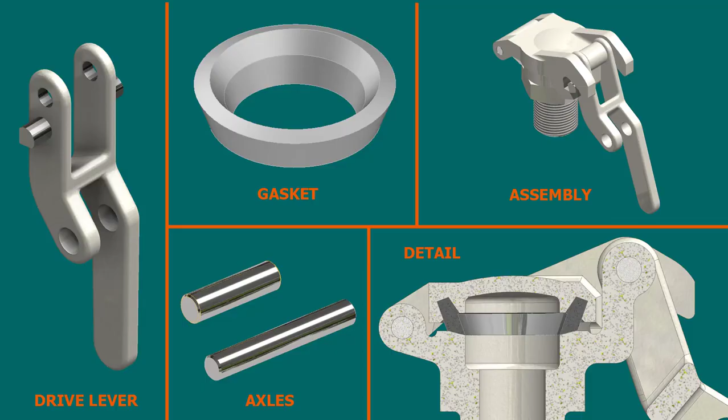Hi my friends, today we'll create the last of 3 parts: drive lever, then a gasket and 2 axles to create an assembly, and then we'll study how this assembly works. The other 2 parts are hinges body and valve lid, and they were presented in my previous 2 tutorials. Today we concentrate on the 3rd object.

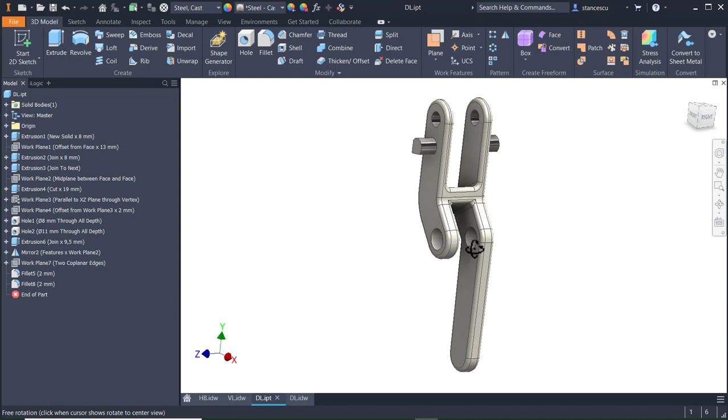This one, which is a handle. Its drawing is this. There are some small difficulties with this contour, but we'll create the part in order by using this drawing.

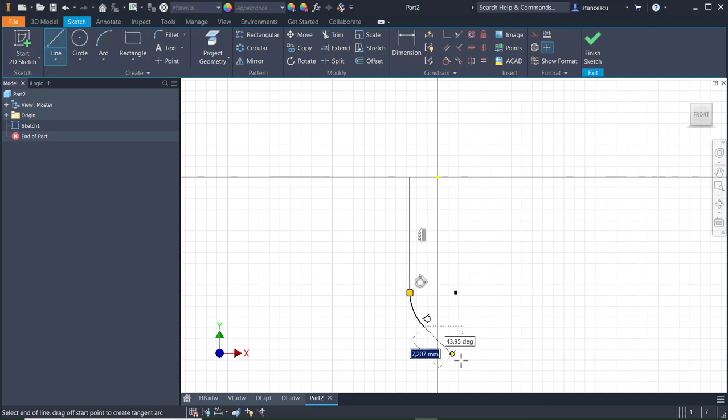Good. Let's start with creating this part. In the plane XY, we draw some lines, arcs, as you can see here, by using methods you already know. If you study all my tutorials, we have no time to repeat everything.

Yes, this is the first contour. This point is coincident with the center point. This arc is equal in radius with the other one.

There is a non-tangent connection between these two. These 2 points are coincident, centers of the 2 arcs.

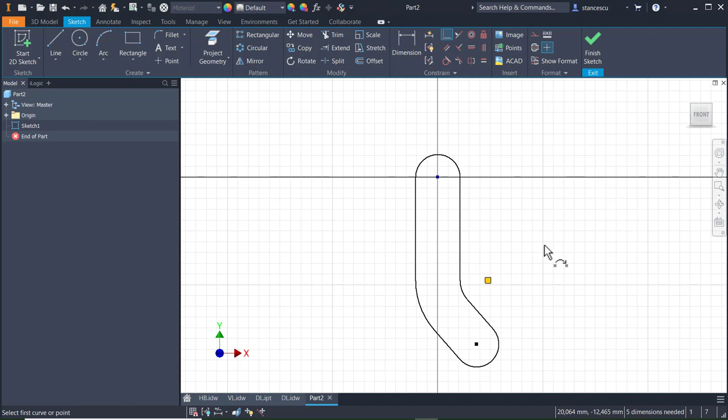Dimensions. This is 10. Everything is scaled now. The angle is 40 degrees. And this dimension is 60, aligned 60, as you can see.

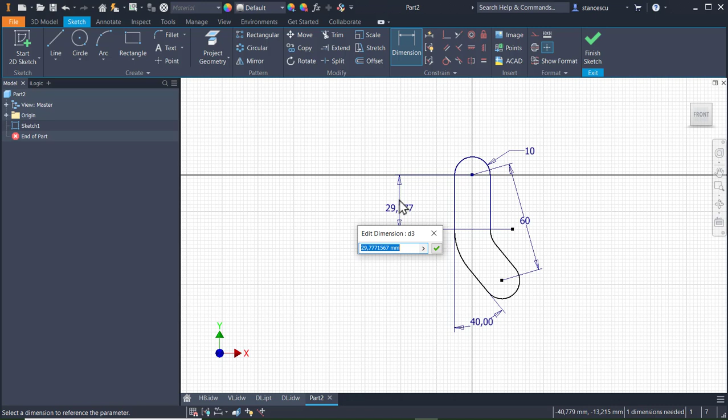Good. Other dimension is the distance between these 2 centers of 38. And one dimension is missing, but I don't know which one. Let's see. Apply. Oh, the radius. I forgot this radius, which is 25.

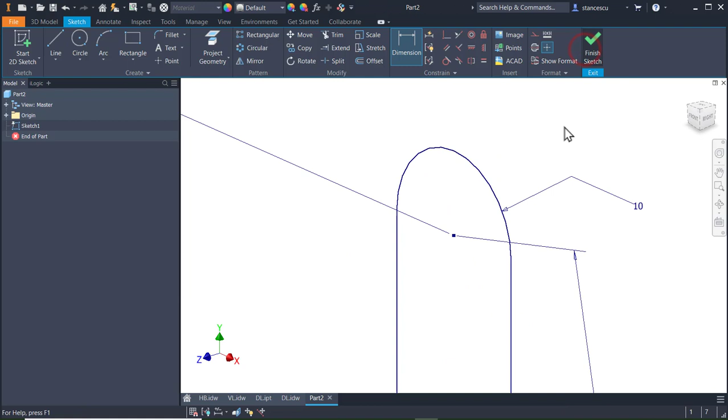Okay, now it's fully constrained. Finish sketch. F6. You see the thickness is 5, but we'll use the thickness of 8 in order to have this thicker arm, and then we'll cut here. So 8 is the thickness for the moment.

Okay, we create another plane at a distance of 13, yes, to be here on this face, and we'll create the other arm by projecting this one and continuing with a protrusion. This.

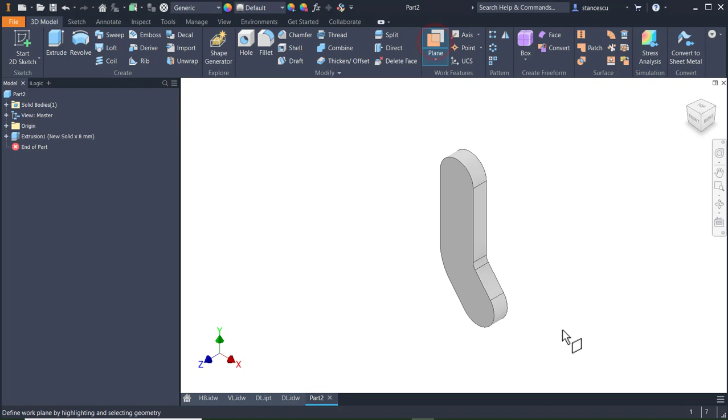Okay. Plane. F6. Sketch. F7, not F7 but project all the contour, F7 to see that contour, and then we create a full circle here.

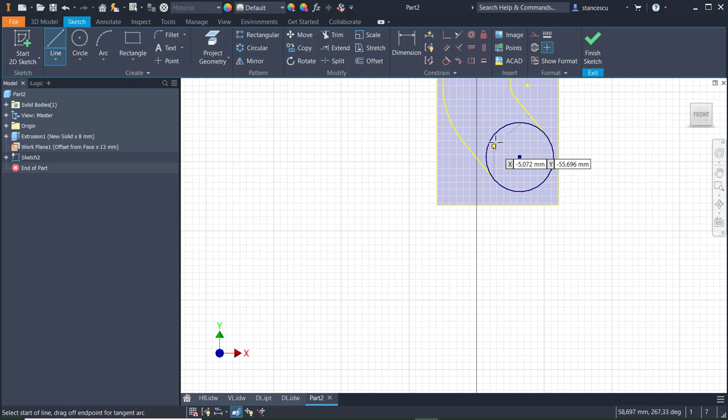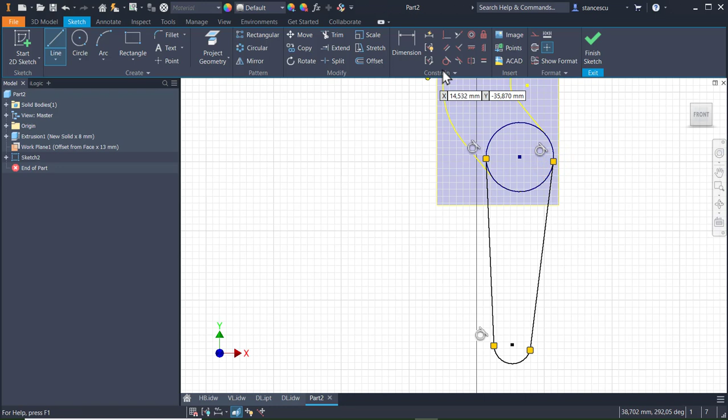And we draw that protrusion. Keep pressed the button and you have a tangent. Keep press the button and you have an arc. And then go back to the circle till you see tangent mark. And then apply tangent also here.

The same vertical for these two centers. A radius of 9 here. And a distance of 60 between the two circles.

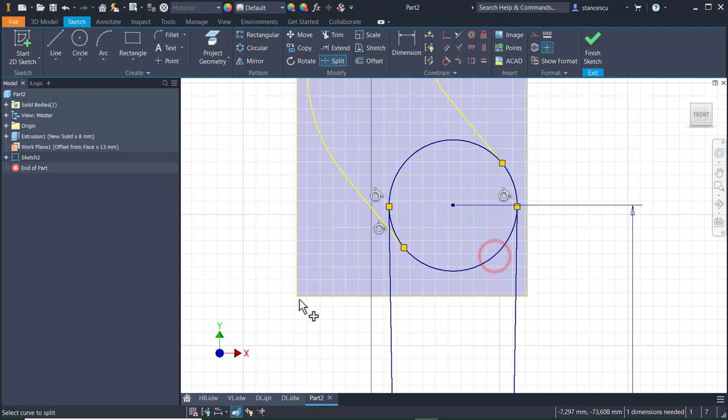60. Now we trim using split this circle in parts to make these two as construction lines, and also this construction. We split also this line to make this construction, and we make construction this line because we draw a new line shorter than this shorter line.

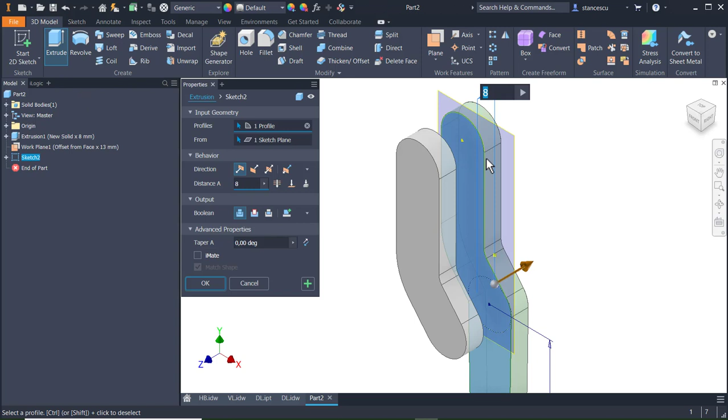Finish sketch, extrude, also 8 in this direction. Okay, visibility. F6. We continue with this connection between the two arms, which is dimensioned here.

As you can see, there is a dimension of 32 for this point and a line at 30 degrees. The other line is parallel 8 millimeters.

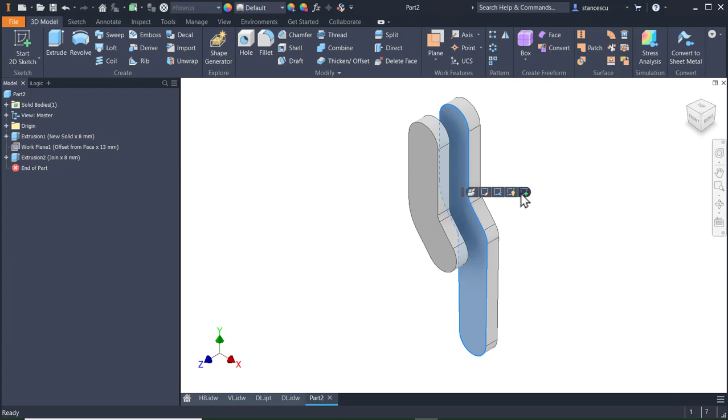Okay, we use this face F7. We draw a line from a point here to this direction, and we dimension it to see where it is placed, that 32. We project the x-axis, this is x, and we make this construction to have no problems.

Dimension 30 degrees here. Another an offset of this line to 8, and then trim, and okay.

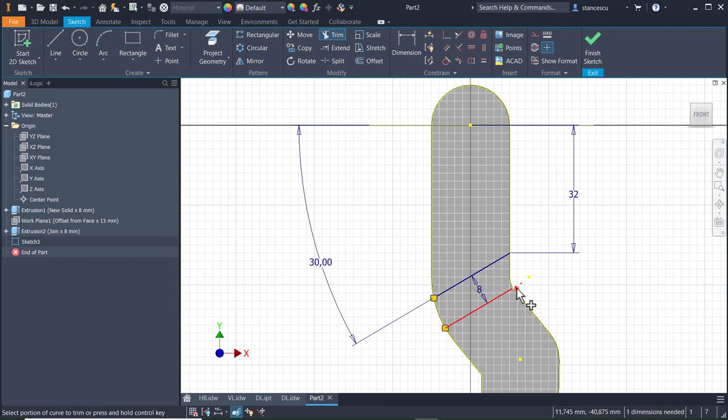Now we extrude this area between the two lines to the part. Okay, F6. This is the main body.

We continue by placing two holes, 8 and 11. This face, this center, 8, plus this face, this center, 7. Not 7, 11.

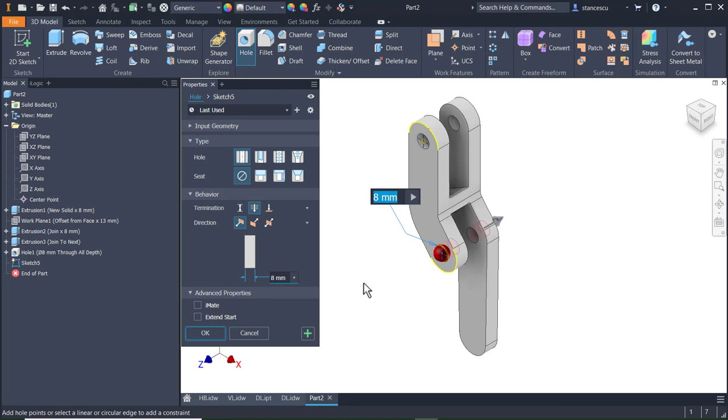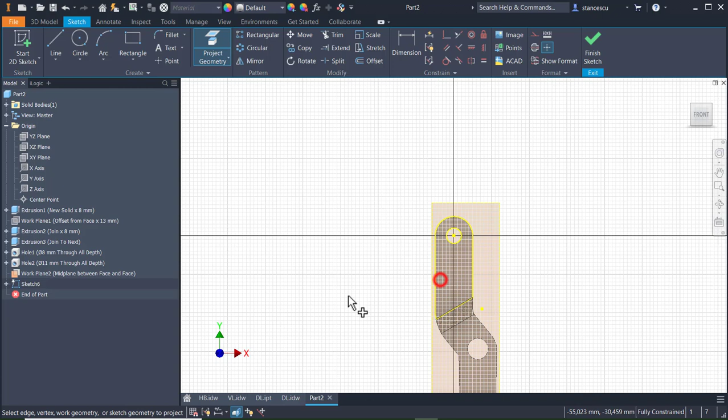Okay, good. Next is a new sketch in a mid-plane between this and this. We select this plane, we select the plane, F7, and we project lines. This face, everything on this face. Okay, and then extrude.

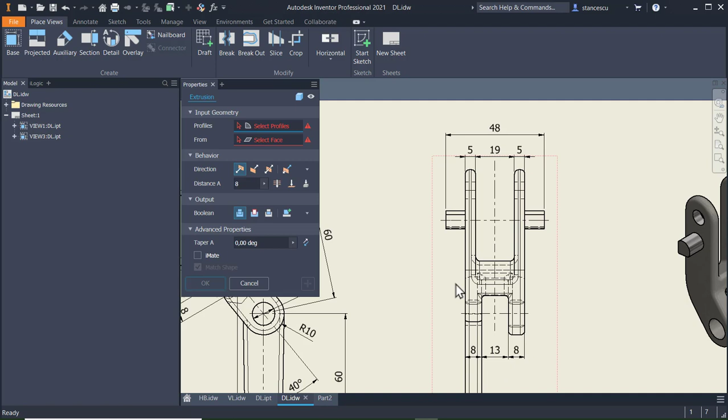You see the dimension 19 is this dimension instead of 13, and it is on the center midplane. Select sketch. This is the sketch, symmetrical, 19, and cut. Okay.

Now this is 5. Let's see. M from Monaco is measure. We measure from here to this line, and this is 5. Yes? Good.

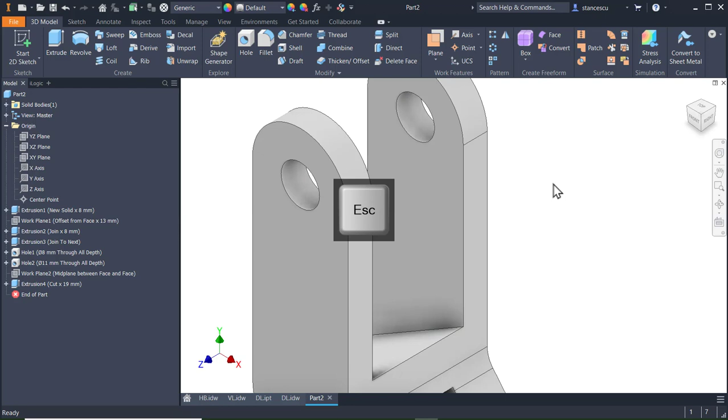Next is this protrusion axle, which is continued here or mirrored, with the dimensions, as you can see, 18.2 to the peak, yes, this point, a radius of 4.5, dimensions of 8 and 4.5. Very important, each of them.

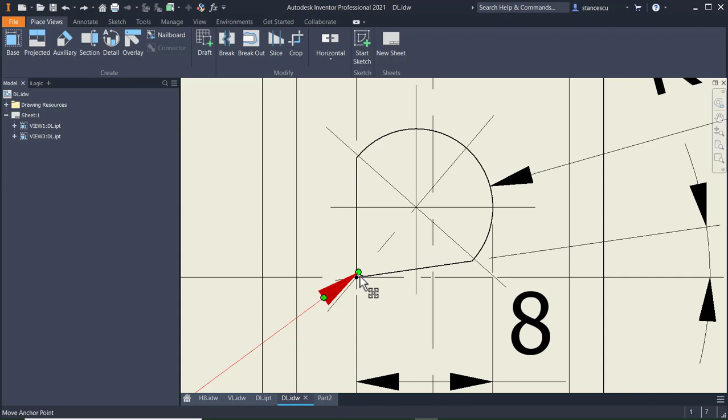We have to be careful with this symmetry axis here, which connects 3 points. This one, or the center of the arc, this one, and the midpoint of this arc. Yes, to be symmetrical, it must connect all these 3 points. Good.

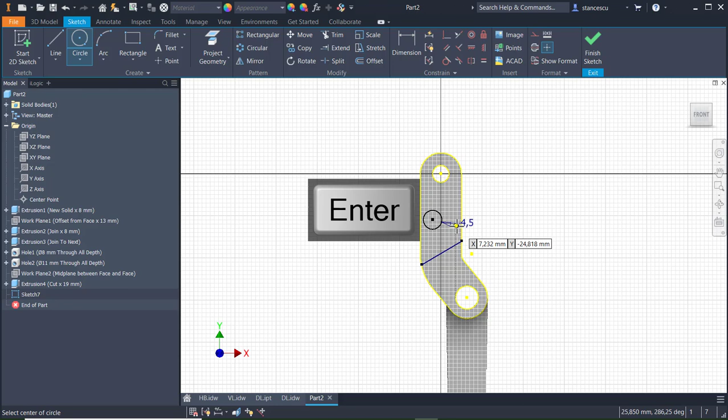Face, circle, with the radius of 4.5, and the distance of 18.2 from this center, 18.2.

Two lines. One is vertical to a point somewhere, and the other is horizontal, is sloped. Yes. Trim. But let me place dimensions before to trim.

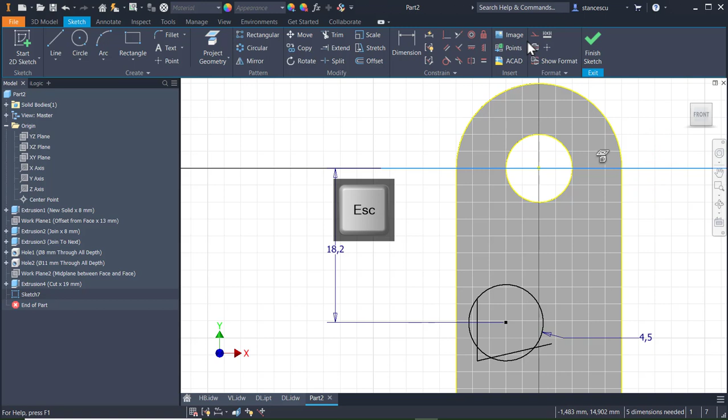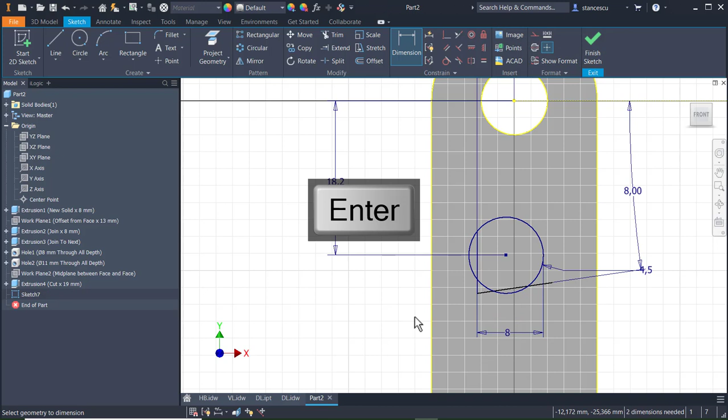Project geometry, x-axis, construction, angle of 8, dimension of 4.5 between this and this, 4.5, dimension here of 8, and we draw a line between this point after we trim.

This, and also this, because this arc is only on this side. A line, construction line, from this point to this point, midpoint.

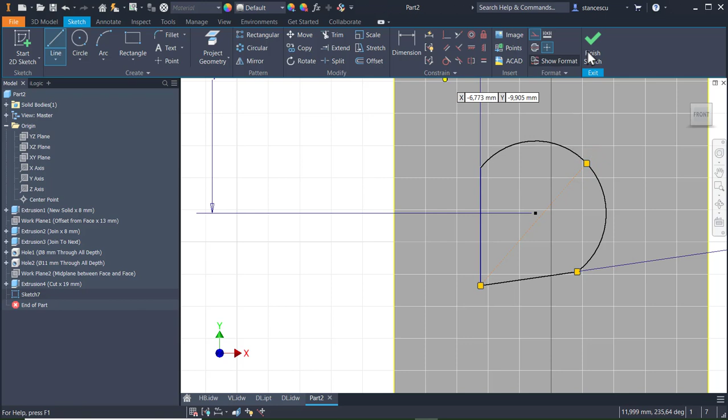Then not construction, not line. And we apply coincident between the new line and this center. Now we place that dimension of 8, and...

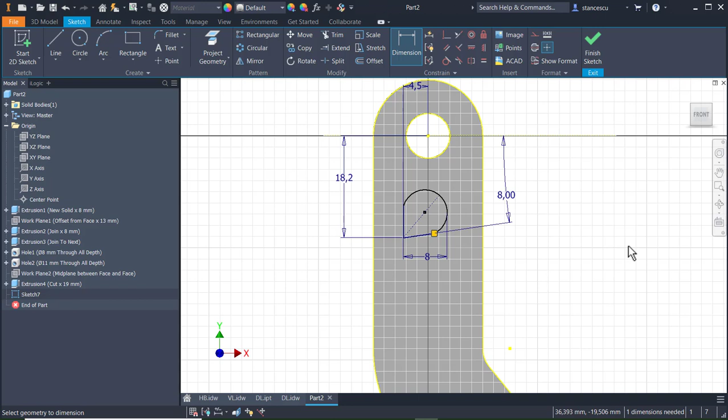18.2 is not here. Dimension from the center to this point, 18.2. There is only one dimension needed, which is the radius of the arc, 4.5. Now we have a fully constrained sketch, and we apply that fillet of 0.5.

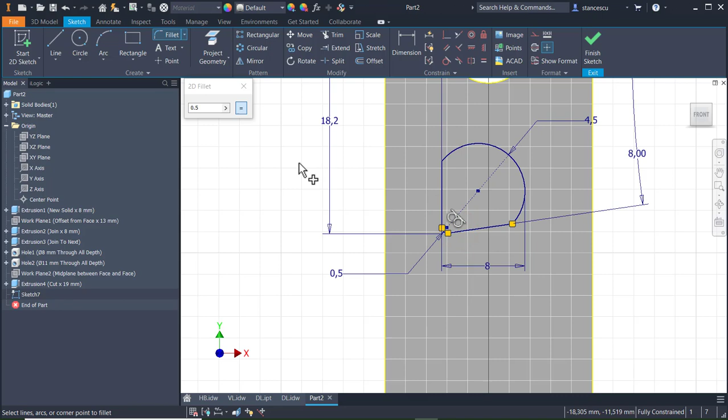To this corner. Okay. What is the dimension of the extrusion? It is 48 minus 5 minus 19 minus 5, divided by 2. Yes? So, extrude.

This is to be extruded on 48 minus 19 minus twice of 5, divided by 2.

Okay, then mirror of this last feature, extrusion, about the midplane. The midplane is written here, midplane, between this.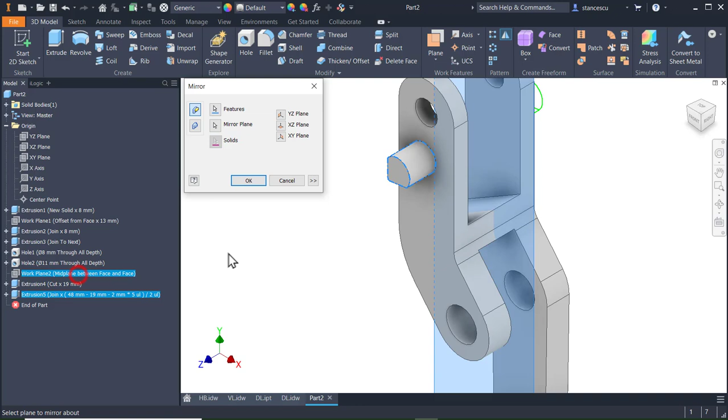Okay, you see this. If you have no description here, you can edit the model by using View, User Interface. This is the model browser. If you lose this because you clicked here, you have it here. Yes, this is the model browser, for you to know.

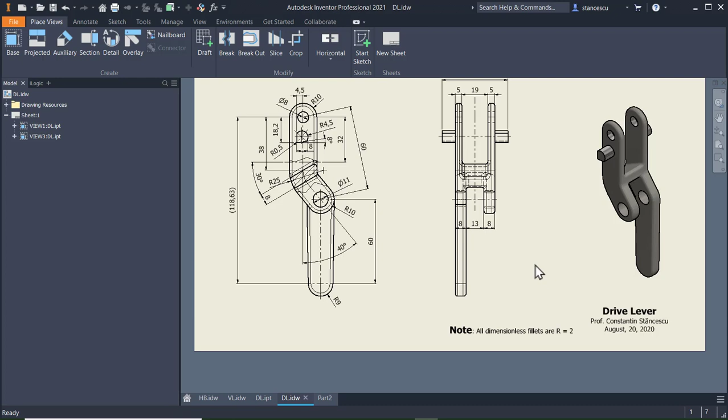The last thing to do about geometry is this. All dimensionless fillets are 2. I suppose there is no other missing feature. It seems to be no problem.

So let's apply fillets everywhere, as you can see, but in 2 steps. Or 3 steps.

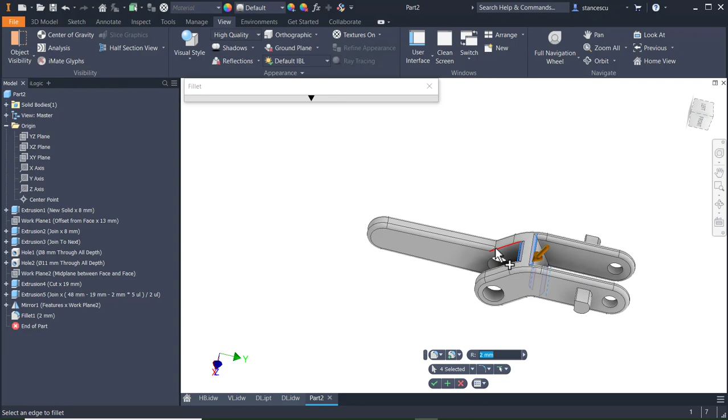Plus 1, 2, 3, 4 edges. Everything, almost everything here is with radius. Okay, this is the part, my friends.

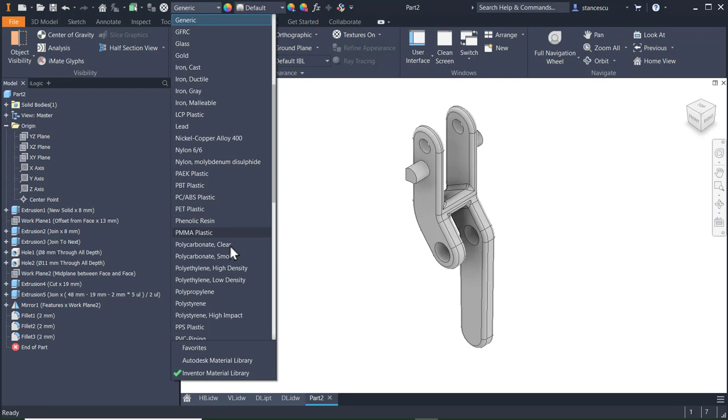Let's apply material, steel cast as usual, and the general aspect of steel cast, and we select some faces to be machined. Yes.

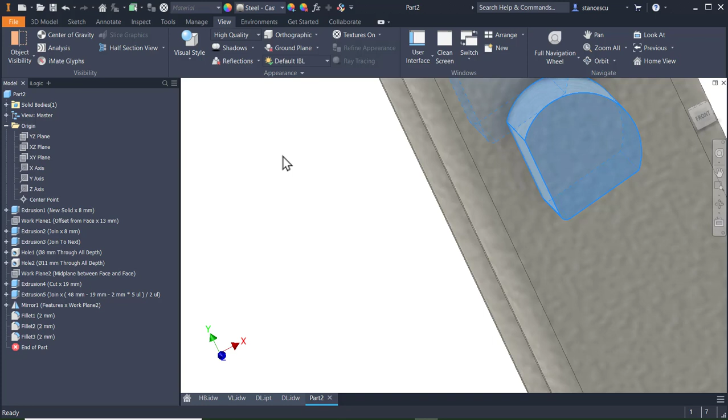And also the end to be polished, F6. This is the part. Let's see what are its data. This is the dimension. Okay.

We save this as drive lever, excuse me, after we made it in the tutorial.

Save. Now we have to create a gasket to be placed in the lid. This is the gasket. This is the drawing. Let's use these dimensions to create that gasket. We have a point of reference which is placed here, and we have to be careful with it.

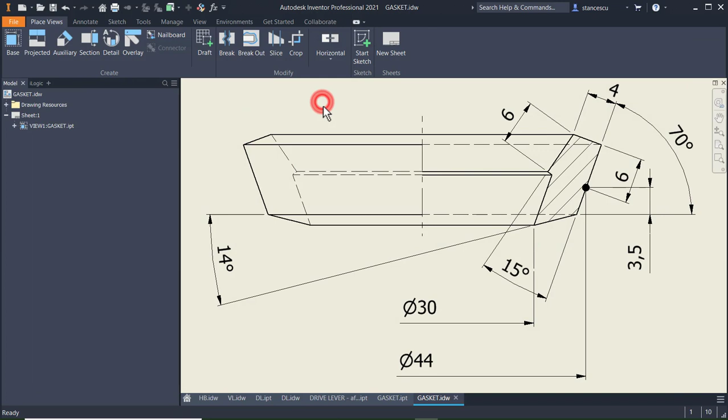Let's create this profile and then revolve. Yes, this plane, line, perpendicular here. We know some dimensions because we created the part.

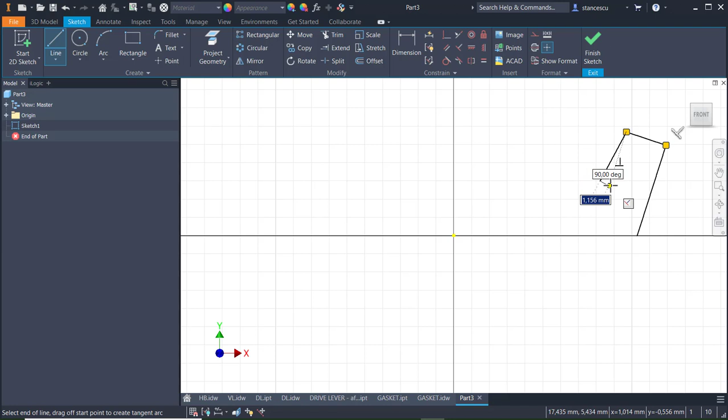Valve lid, which is the place where this gasket will be placed. We project x-axis, construction, and y-axis as a center line.

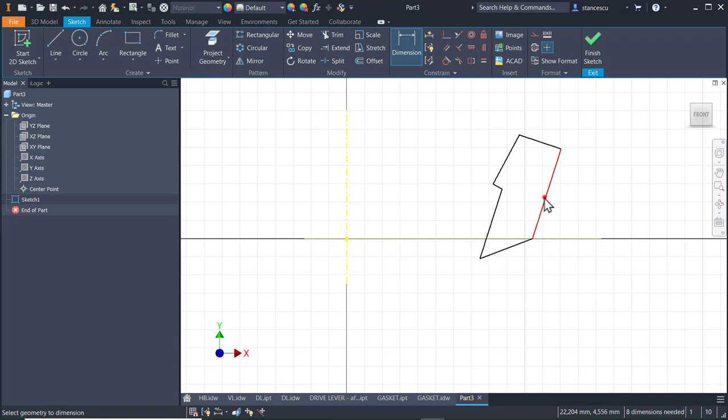We place this point on the horizontal, so select the point and select the horizontal. Then angles, we start with angles. This is 70, as you know from modeling the valve lid.

This is 14 from the hinges body. This is 15, and this is perpendicular on this, and there are two parallel, these two. This already exists from construction.

Okay, other dimensions, 4 millimeters aligned, 6 millimeters aligned, and a point placed on this line at a distance of 3.5 from the horizontal. 3.5.

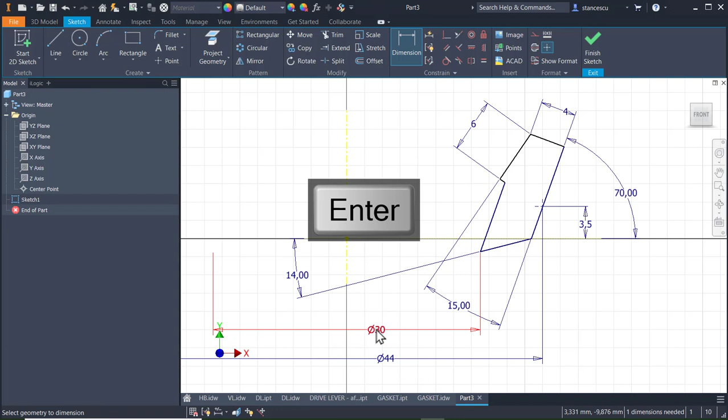This point is placed at a diameter of 44. Look, almost 44 is, and this is 30. Almost 30 it was. Good. Only one dimension is remaining, and this is 6. That's all, fully constrained. Finish sketch, revolve.

And the tutorial. Okay. Having all these elements, we have to create only the two axles. I don't create them, they are very simple. You will understand when we create the assembly. Let's create the assembly.

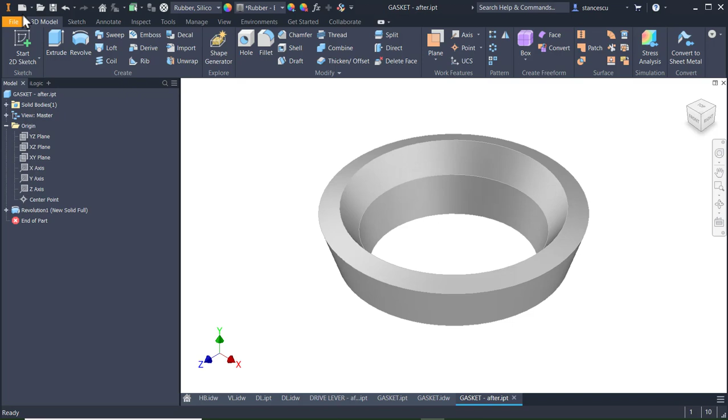Standard millimeters IAM. We place, we select from this tutorial, we select hinges body, but I want to place it somewhere like this.

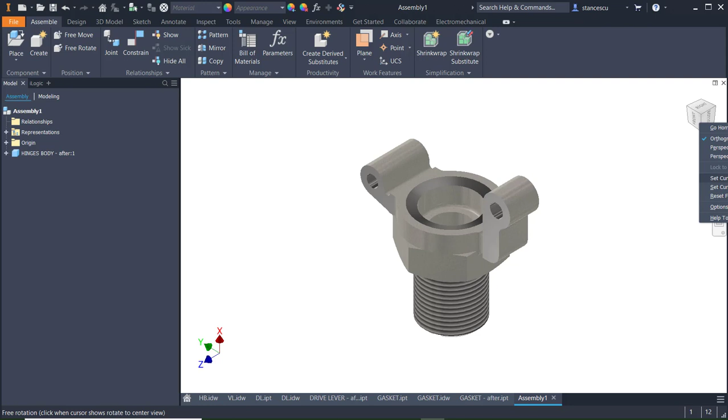Yes, this is the point of view, and I want to have this as a reference. Oh, and the reference, set current view as home, fit to view. You know this. Everything I do now, if I click on F6, it stays here.

I have to place it in the space. Yes, the axis of the part, no, faces. This face is with this face. Yes, I apply constraint and...

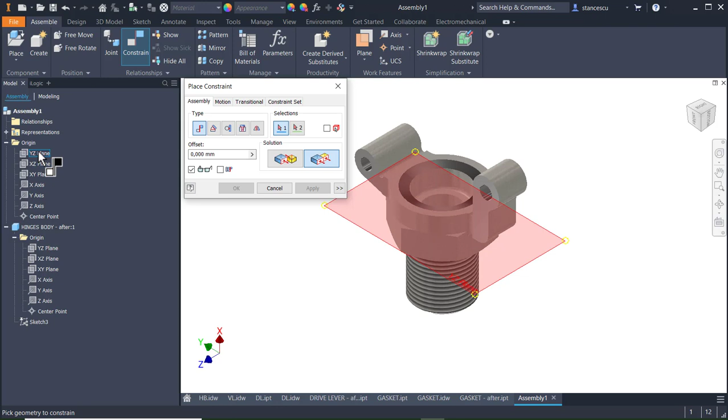Flush for this plane with this plane. Apply, for this plane with this plane. Apply, and for this plane with this.

Okay, now this is grounded. It cannot be moved. If I press the wheel, I can move the picture, but if I press the left button, I cannot move. Yes? Good.

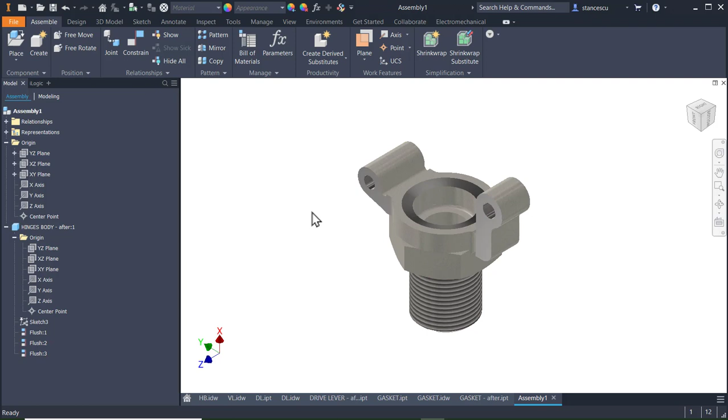We place then the valve lid after. This is. We place the drive lever after. We place the gasket after, and the two axles which you must create for yourself. They are not necessary for assembly. They are necessary for us to place parts together, connecting with axles.

Okay, now the first thing is to place this gasket and this lid. I constrain, but now I have to rotate this. Yes, rotate freely, free rotate for this to be reverted.

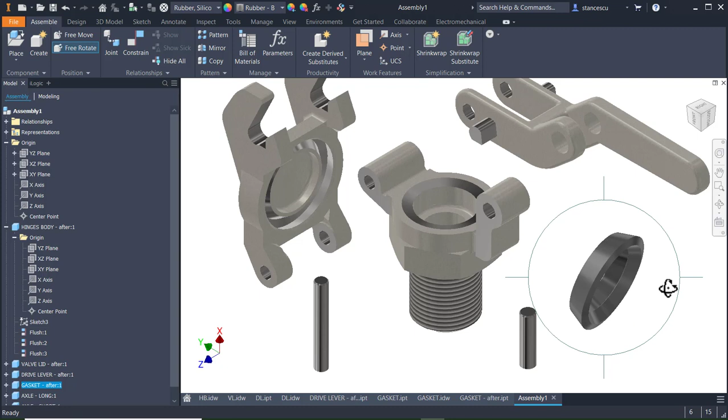So, escape. Now axis, this axis with this axis. Okay, now I move it a little to place the point, center point of this circle to the center point of this circle. You see, this one.

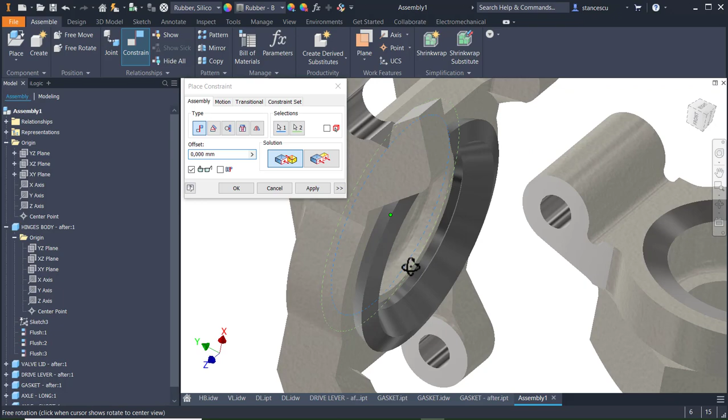Now the gasket is placed in position. Look at it. Yes, inside the channel in the lid. Okay, good. Now constrain this axis with this axis. Apply.

Then the symmetry plane of the lid, this is the lid, symmetry plane is XY, over the symmetry plane of the hinges, which is also XY, but not that too, because it is not possible.

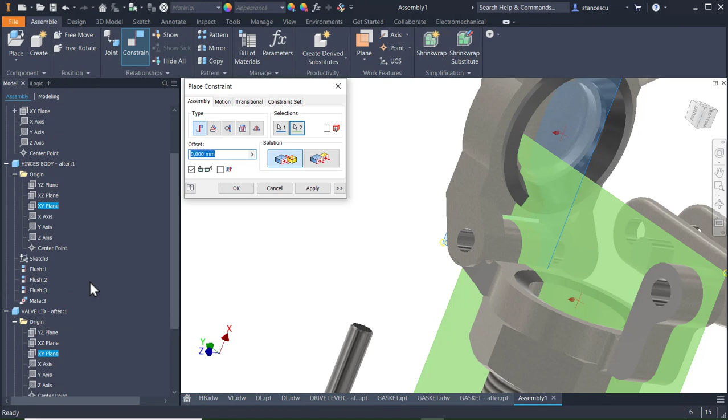Center point. Once again, constrain this plane of the lid with the center point of the hinges body. Apply. Same for this. Axis on axis. This is the drive lever.

Then apply. Let's go to the drive lever, the plane XY, with the center point of the hinge's body.

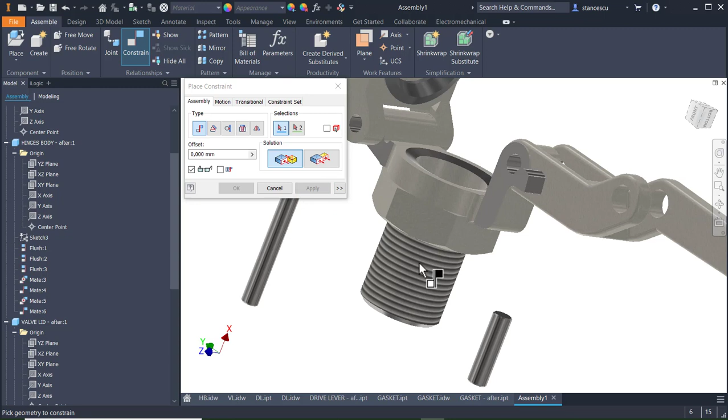Now we can make anything from the point of view of Inventor without axles. Yes, we can study everything, no problem, but we place axles to have no empty holes there and to be reasonable in the mechanical way.

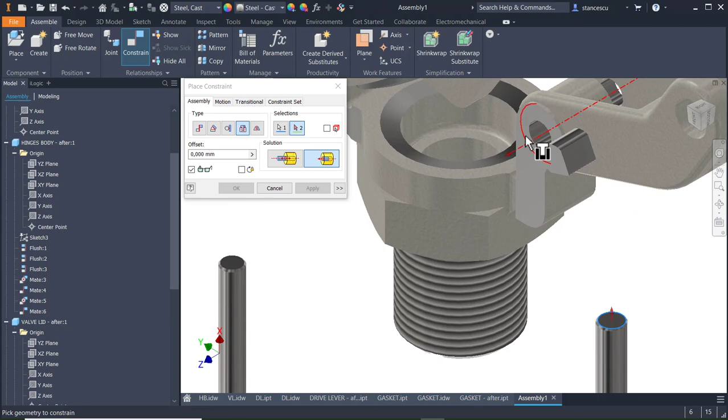So I apply, insert, and this to be placed here. We are sure about... this is not good. This is not the center point.

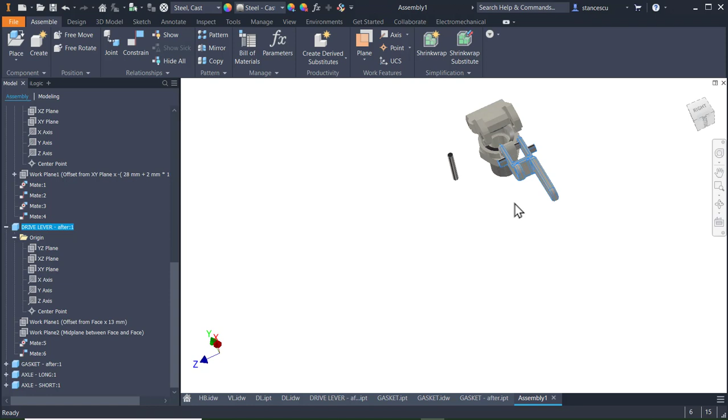Apply here. This is okay, and we have to change the position on this direction of the drive lever. Drive lever is this second.

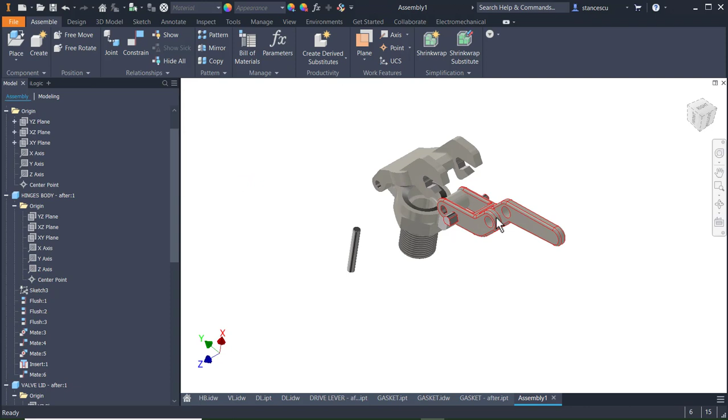Constraint we delete, and we constrain the mid plane, this mid plane of the drive lever. You see, this is the one with the center point of the hinge's body. Okay, this was not created symmetrical like the other two. This is why.

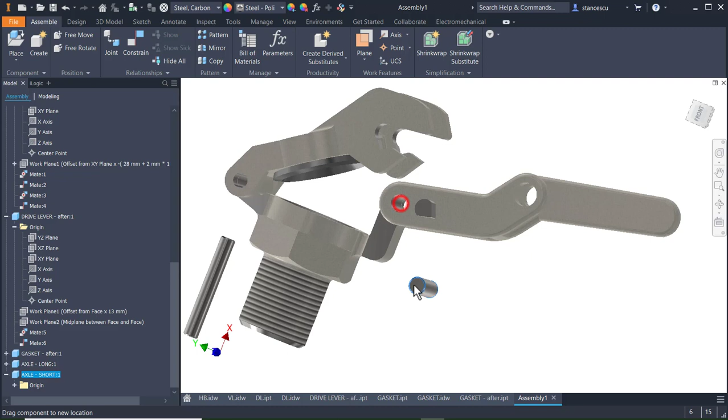Well, now the short axle is bad placed. We delete this insert and we get it out to place in a proper position. Constrain, insert this, aligned with this. Now is okay.

Apply. The other one is the axle long, which must be fitted here. Okay, F6.

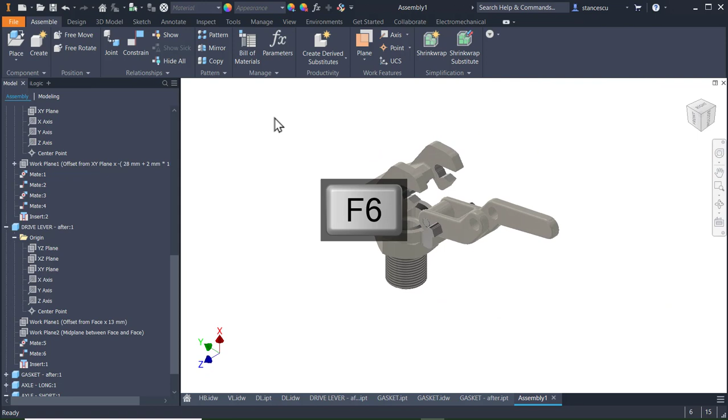This is the assembly at the beginning. Now we want to study how this assembly works. The lid must be closed and the drive lever must create this movement.

To make this, we make what we already know from the Malta drive in my previous format tutorials.

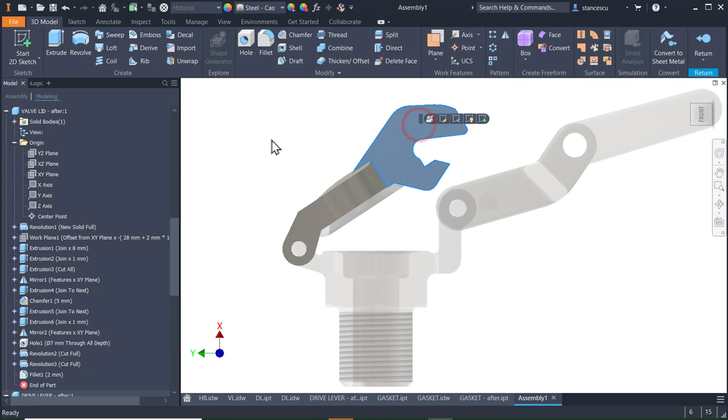Let me apply a color to this face, for instance green. Green, polished, and another color to this end, for instance orange. Save.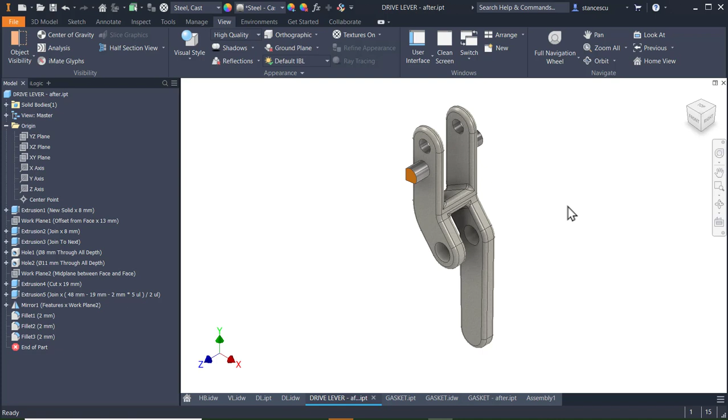You see, they must come together to close the hole. Yes, this is a hole which must be closed by the gasket inside the lid.

As I said, we use a procedure we already know from the Malta projects in my former tutorials, which means that we select these two bodies. I selected the lid and the drive lever. Then I apply contact set because I want to study the contact between them. These two are in my new contact set.

If I close the deployment of the browser, you see very well this. Yes, they are special. They are in the attention of the inventor. But this is not enough. Yes, nothing is changed.

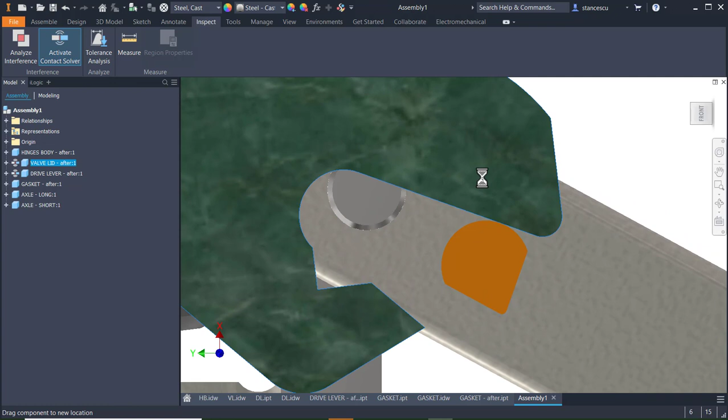If I want to use this selection, I activate contact solver. Now Inventor is very well dedicated to see what happens when we move parts. And you see, yes, that when I move a part, the other one is also moving at the contact.

So we rotate the handle till here. Yes, and this can be made. I don't have here in attention the gravity. Yes, this is always in contact with this because of the gravity. Yes, this is the normal position of this assembly.

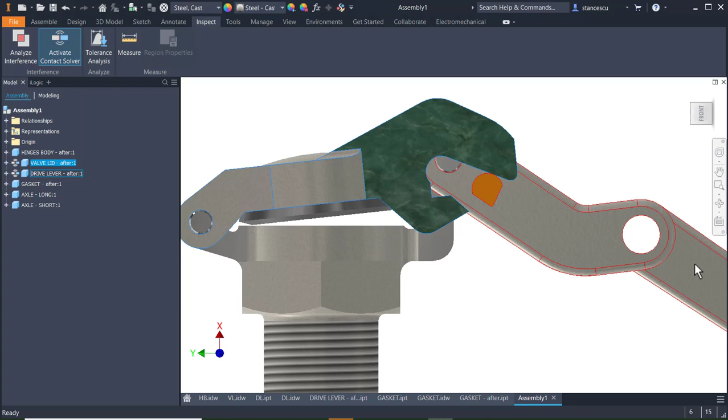And this is the moment when it closes. Let's make another thing. Let's apply view, half section view, and select this plane XY. Okay.

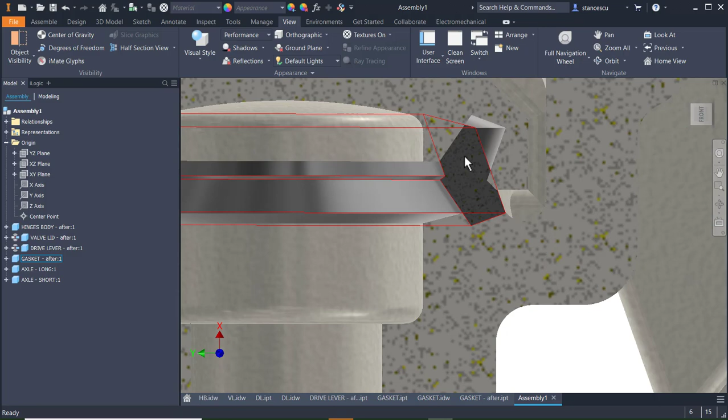Now we see the gasket. Yes? Oh, the gasket is placed wrong here. Yes, it is placed wrong. Let's select the gasket. Let's eliminate its mates. Delete. Let's move it outside.

We rotate it in position. We rotate, free rotate. So now it is cut by the plane, you see.

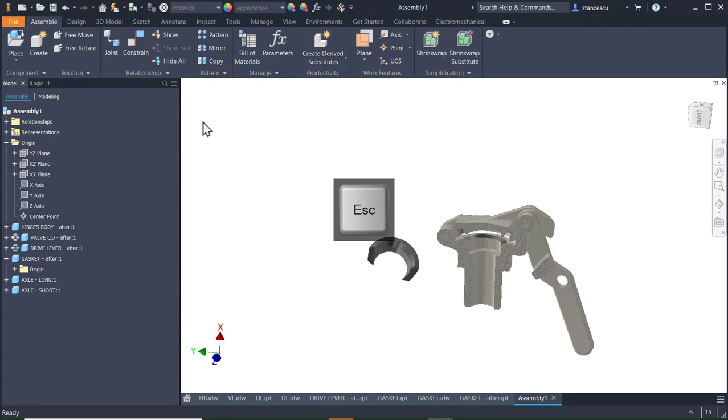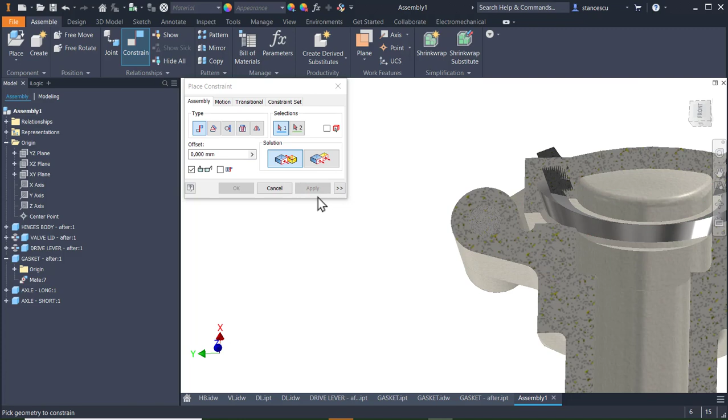So I apply constraint axis, this axis with this, not the axis of the lid, with this, apply, and then I move the gasket inside the lid to find its position. This face.

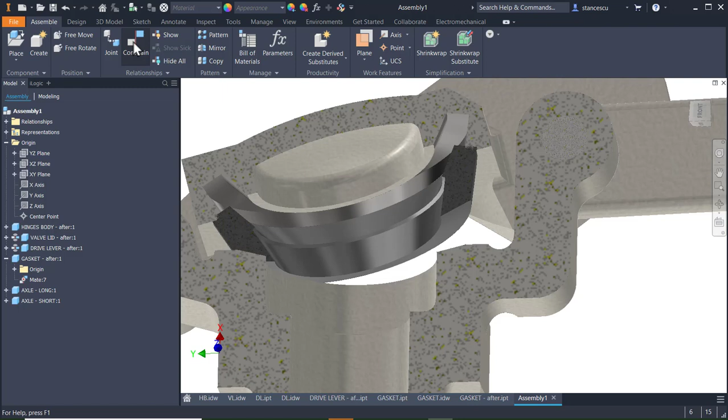Let me open the device to have visibility, and now constrain this conical face with this conical face, apply.

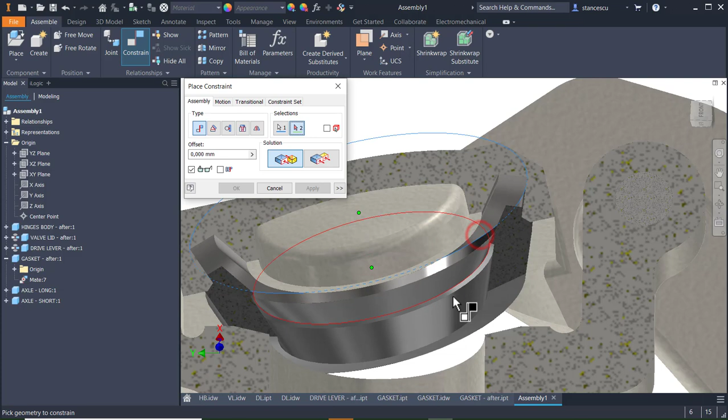Not good. Delete, and make what we did before. Constrain the center of this circle. You see which one to be... there is no distance. Now it is.

You see, I have to see each one elements. Constrain this point, the center of this circle, with this point. Now is okay.

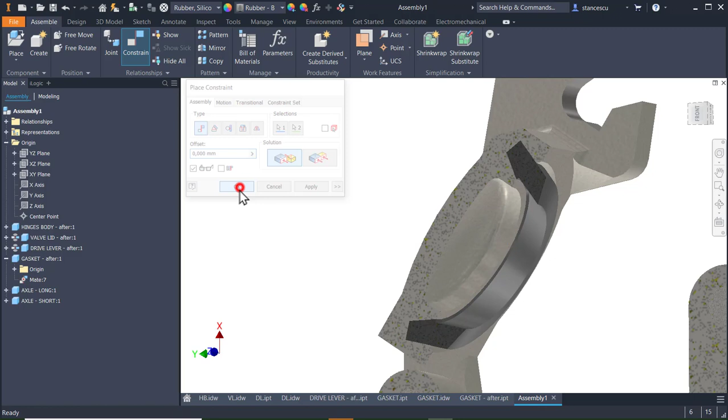We look from the side. We move this to the drive lever. We rotate it to be together. Nothing is changed when we think about the contact set.

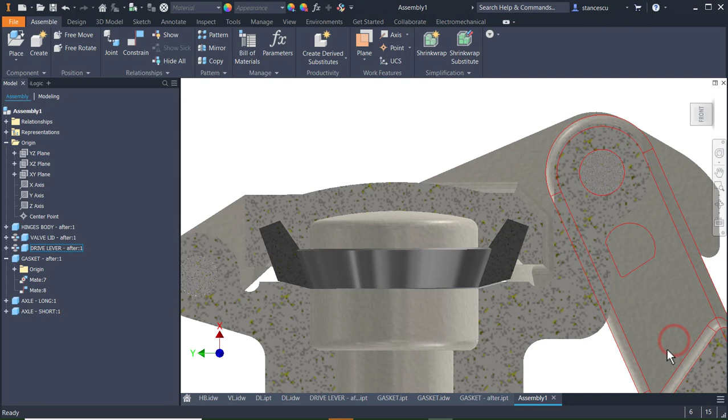Now we can see very well what happens here. Yes, when I rotate the drive lever, as you can see, there is a moment when they come in contact here. Yes, the rest of the movement, which I'll apply now, is dedicated to compressing the gasket onto the face. Yes, look, this is compressing.

Eliminate. Now you see very well here. Yes, the gasket is inside the body. I don't want... I cannot create the compression itself. I only show you the situation. Yes, this is the situation.

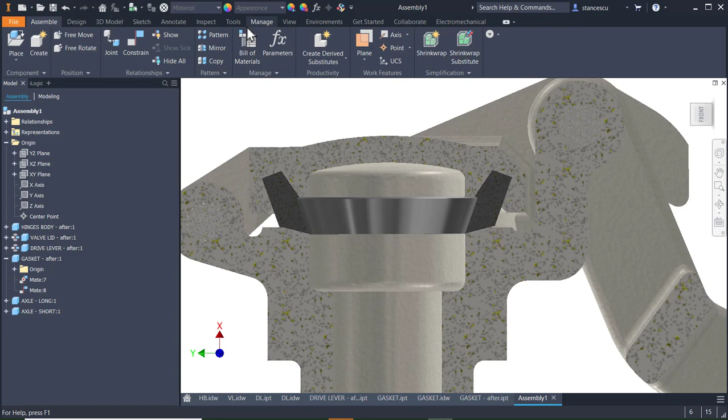Okay, now you have all the image. I go back to the half section view elimination. From here, end section view, and we know that now the gasket is in contact with the hinge's body, and the next movement is only compressing the gasket.

Very interesting situation.